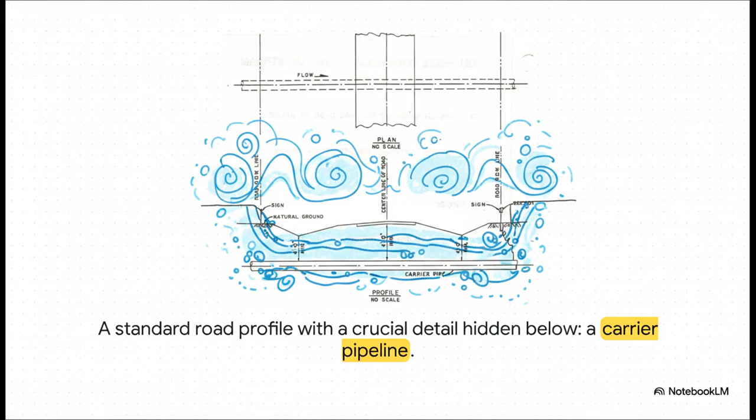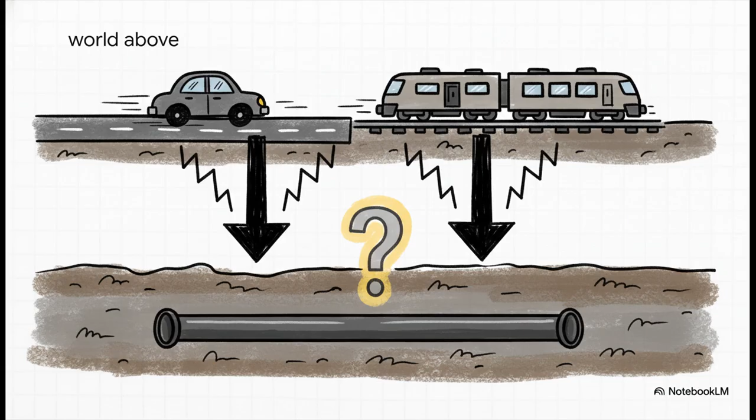Okay, so our pipeline's journey isn't just through empty fields, not at all. It has to navigate the world that we've built right on top of it. And its first big challenge, getting across the very roads we drive on and the railways that connect our towns and cities. Just think about it for a second. You can't just dig a big trench across a busy highway or a major rail line. The constant weight, the vibration from traffic, that would be a total disaster just waiting to happen. So, this gave engineers a really critical problem to solve. How do you protect this essential pipeline without messing up the world above?

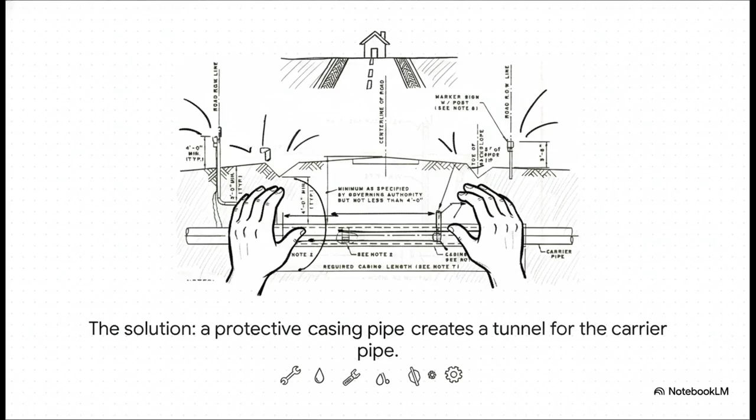And this diagram shows the solution perfectly. It's so smart. Instead of putting the carrier pipe directly in the ground, engineers first install a bigger, tougher pipe called a casing pipe. It basically acts like a personal protective tunnel. The carrier pipe just slides right through it, completely shielded from all that stress and weight. Oh, and see those vent pipes on the ends? That's another clever safety feature. It lets any potential leaks escape to the surface where they can be detected.

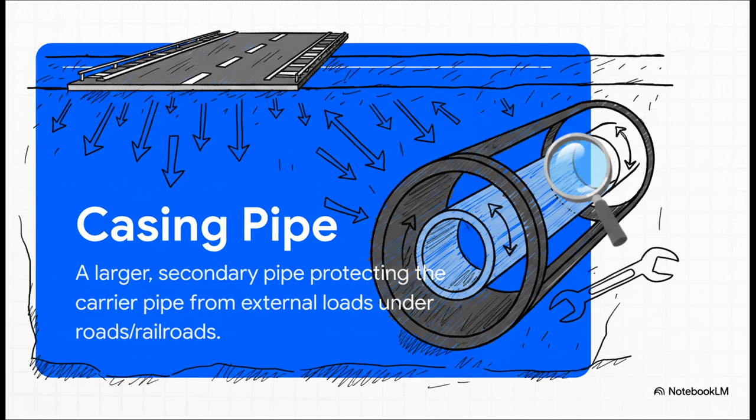So a good way to think of it is that the casing pipe is a pipe for the pipe. It's really a brilliant piece of sacrificial engineering. It takes all the hits, all the pressure, leaving the important carrier pipe inside totally safe and sound. And, big bonus, if that carrier pipe ever needs to be fixed, you can potentially replace it without having to dig up the whole road.

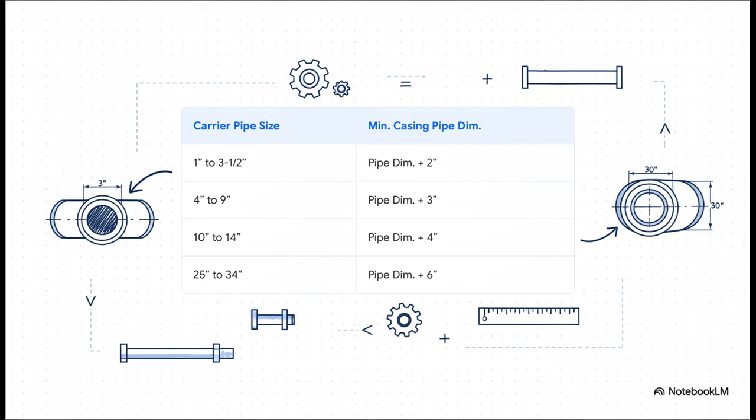And yep, you guessed it, this exact same idea applies to railways. The load and the vibrations from a train are just immense, so that casing pipe is absolutely critical here too. It provides that same essential tunnel, making sure both the pipeline below and the tracks up top stay safe and secure.

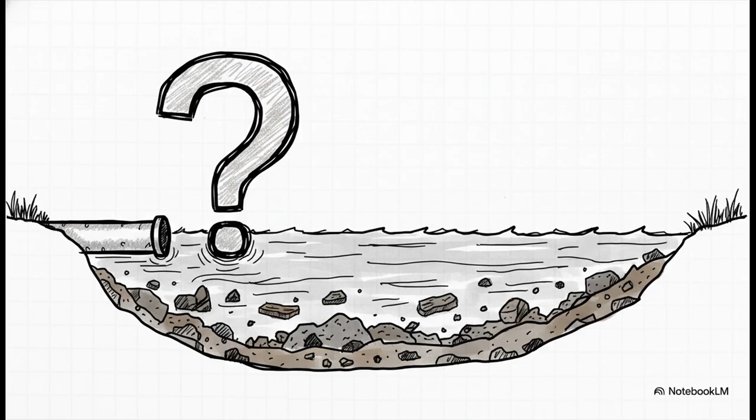Okay, so our pipeline has successfully navigated all the stuff we've built. But what happens when it runs into a natural obstacle? Something like a river. Right, you can't just lay a pipe on the riverbed. I mean, it could get battered by currents, smashed by debris, or messed up by shifting sand. And building a whole bridge just for the pipe, that's not always practical. So how in the world do you get from one side to the other safely and securely?

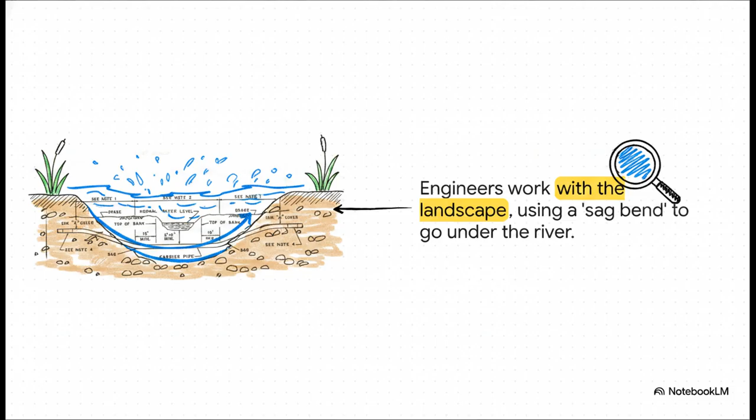Well, the solution is just this really elegant design. Instead of trying to go over the river, they go under it. The pipe is bent downwards on one side to travel deep beneath the riverbed, and then it bends back up on the other side. This really graceful dip is called a sag bend.

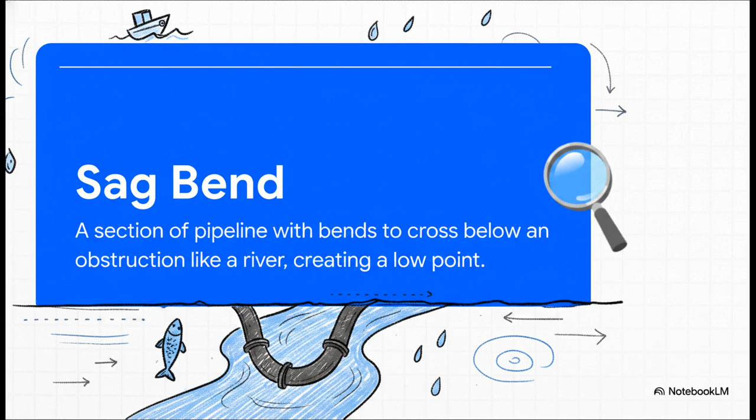By burying the pipeline way down, safely below the river's lowest point, it's totally protected from anything going on in the water above. It is a perfect example of engineering that works with the landscape instead of trying to fight against it. So, we've seen the big picture solutions for crossing roads and rivers, but the safety of a pipeline really comes down to the tiniest details.

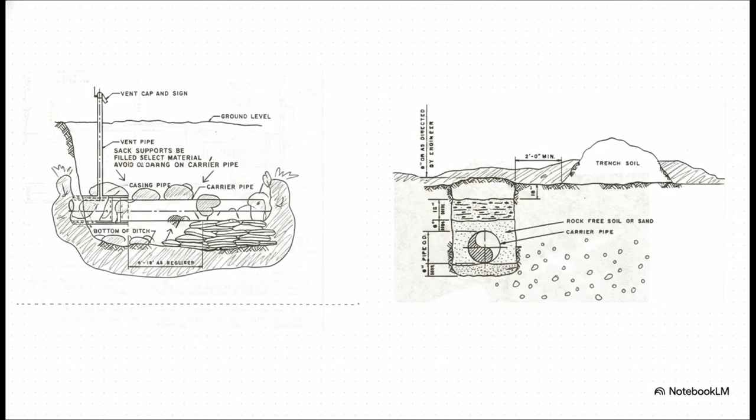Then on the right, we see the macro-level support. The whole trench is lined with a soft bed of rock-free soil or sand to just cradle the pipe. It's protection from the inside out. So let's just recap these layers of protection because they're all important. First, you've got the bedding, which gives it a soft cushion.

Then, the centering supports make sure the pipe never actually touches the outer casing. The materials for those supports are specifically chosen so they don't scratch the pipe's anti-corrosion coating. And finally, engineers make sure there's a safe distance from any other underground utilities. It's a whole system of interlocking protections.

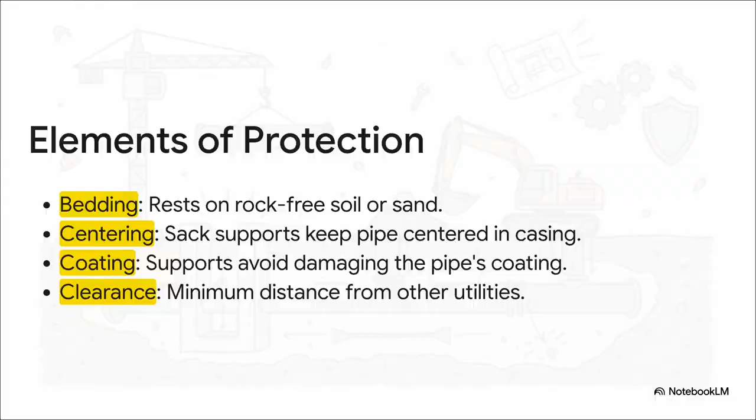Now that we've seen all the individual safety measures, let's pull back to the big picture again and see how engineers plan for a pipeline that could stretch for hundreds and hundreds of miles. Exactly. You can't just guess how far apart to put these things. If they're too far apart, the pipe could sag under its own weight and break. But if they're too close together, it's just inefficient and super expensive.

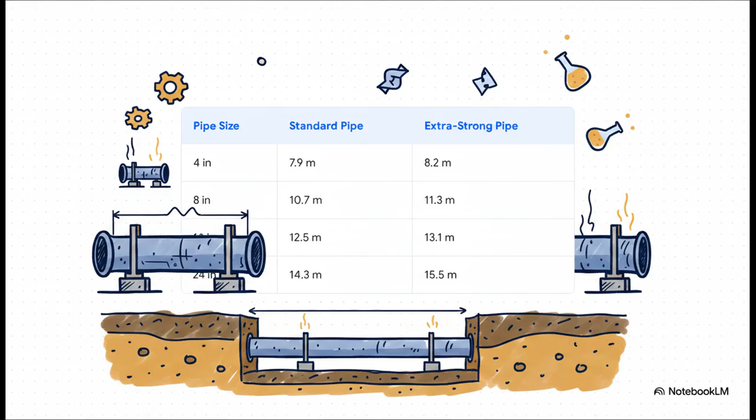But for a much tougher, more rigid 24-inch pipe, that distance can stretch to over 14 meters. It's all a precise guide based on physics and material science. And this right here, this reveals the crucial trade-off that engineers are always dealing with. Look at the table again. An 8-inch extra strong pipe can span just a little bit further than a standard one.

So if you use that stronger, more expensive pipe, it means you need fewer supports, which could save money on installation. It's this constant balancing act between material cost, safety, and overall efficiency.

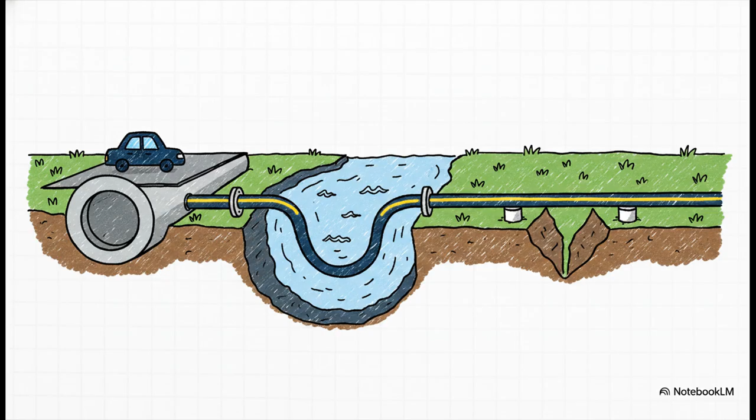So from protective casings under our roads to sag bends deep below rivers, and all of it governed by these precise calculations, there is just a brilliant world of engineering at work, totally out of sight. It's an invisible system that every single one of us depends on, every single day. It really makes you think, doesn't it?

The next time you're driving down the road, just take a second to think about the incredible journey that's happening right underneath your wheels. What other hidden feats of engineering are out there, powering our lives without us even realizing it?